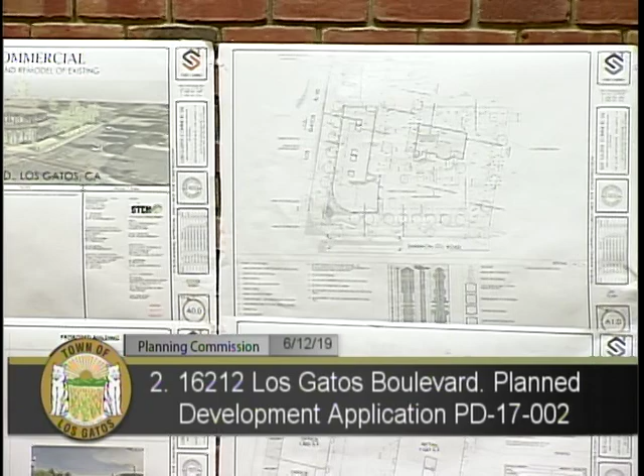The current proposal is for a two-story commercial building with retail space on the first floor and office space on the second floor. A negative declaration was prepared for the project.

The proposed PD application is consistent with the mixed-use commercial general plan designation, Los Gatos Boulevard plan, commercial design guidelines, and underlying commercial or highway commercial zoning district, minus the front setback and landscaping requirement of 15 feet on Los Gatos Boulevard. Staff recommends that the Planning Commission forward a recommendation of approval to the Town Council. This concludes staff's presentation, and we are happy to answer any questions.

Very good. Thank you. Are there questions? Yes.

As it is currently written with it being partially office, are there any limitations to the use of that, such as is there anything limiting medical offices or anything of the sort on this project? That can be added as a performance standard, that medical office is prohibited, given that that's a different parking and traffic ratio.

Other questions? I had a couple of questions. I have many questions about traffic, but I'm going to hold those until after the public hearing. But I had a couple about the process. So I understand that the review of the PD is an opportunity for the Planning Commission to review the architectural compatibility, style, and details. Is that correct? Is it the purview of the Planning Commission to review the architecture at this point?

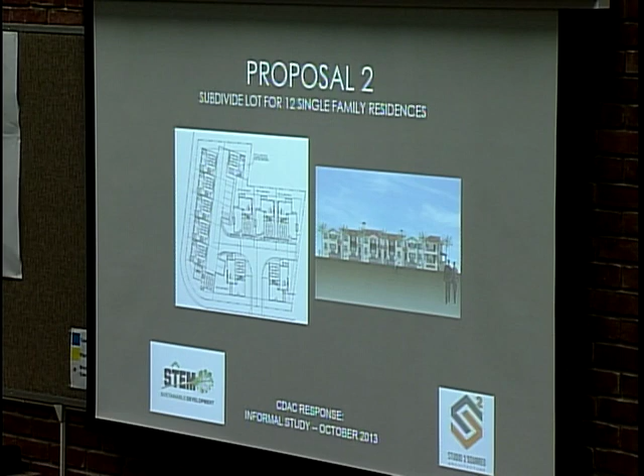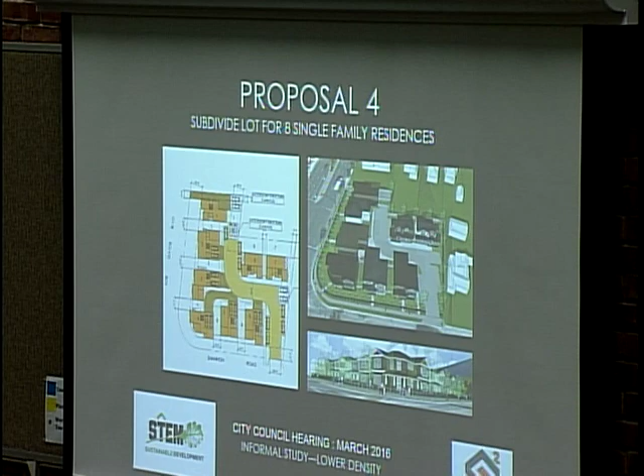From 2013 to 2016, we worked on a variety of housing-only proposals of various density. Though we felt our residential project fit well into its context, ultimately the community and the town council did not agree. At a town council meeting in March 2016, they advised us to explore a purely commercial option that was conforming with all aspects of the town zoning ordinance. This was actually the final design we presented to town council back in 2016.

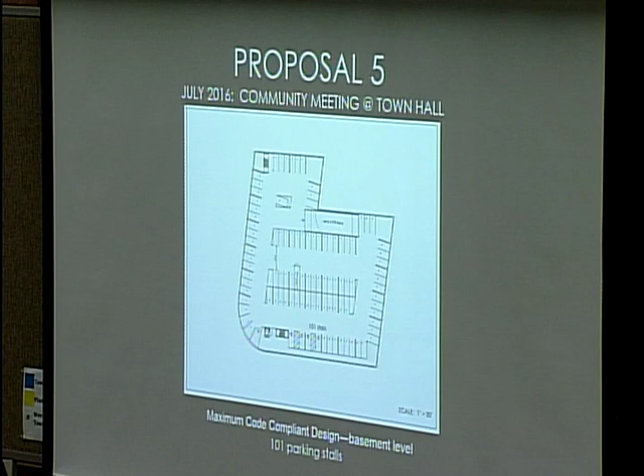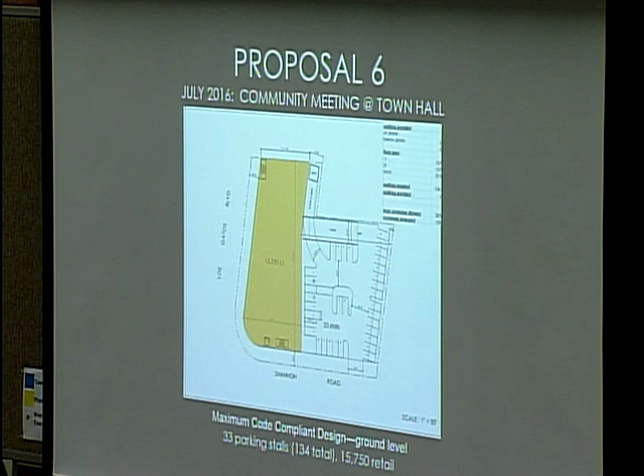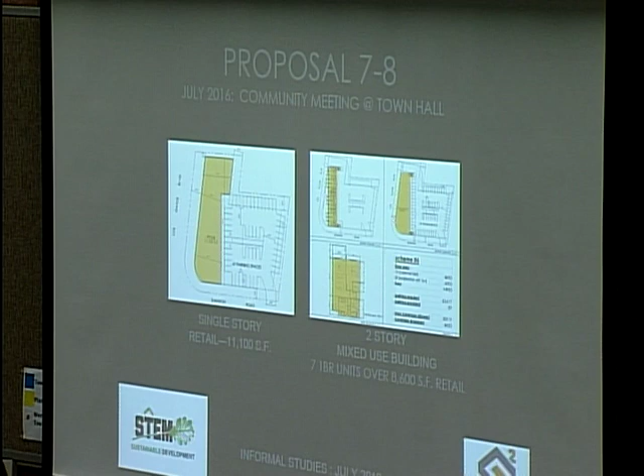Based on that recommendation, we regrouped and began to consider a fully commercial project, presenting a few different conforming alternatives at a well-attended community meeting at Town Hall hosted by Planning in July 2016. Among these options were a fully underground parking garage with additional surface parking and a 2-story retail and office building of 31,500 square feet; a mixed-use project proposing 7 one-bedroom apartments above 8,600 square feet of retail, with an all-new retail building of approximately 11,000 square feet; and finally, a retail proposal that preserved and renovated the existing 1-story dealership building while adding a retail building at the corner with a partial second-floor setback to reduce the scale of the building as seen from the boulevard.

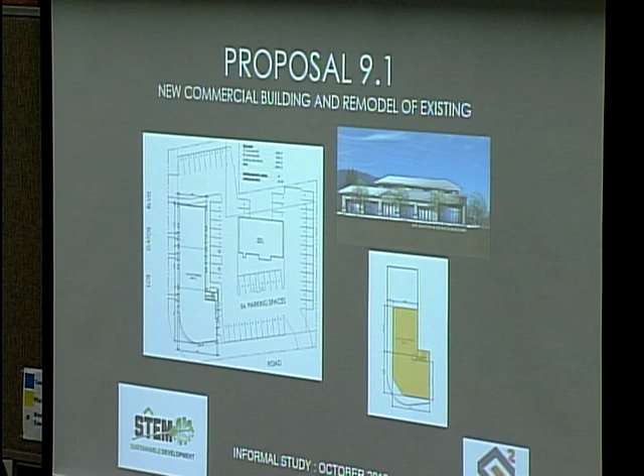That concept proposal was then developed further and formally submitted for review to the town in February 2017, largely as depicted in these few slides here.

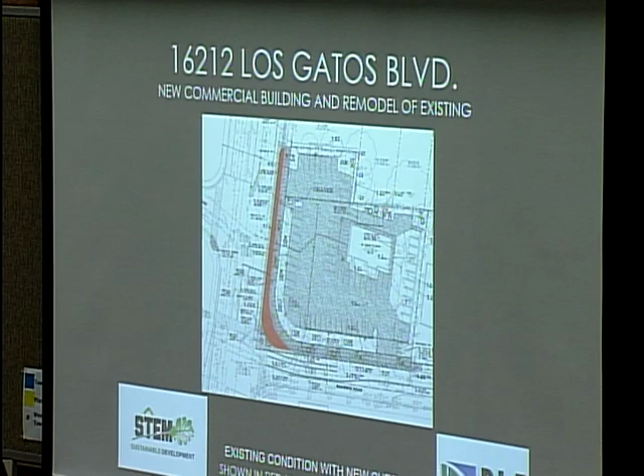During the town's initial review, staff advised us that the recently adopted Safe Routes to School program would impact our application. Here to talk about our team's response to that requirement is Scott Shork of BKF Engineers.

The Safe Routes to School program was implemented midstream in the development, and what it requires us to do is actually narrow Los Gatos Boulevard by a lane. The green markings show the new bike lane.

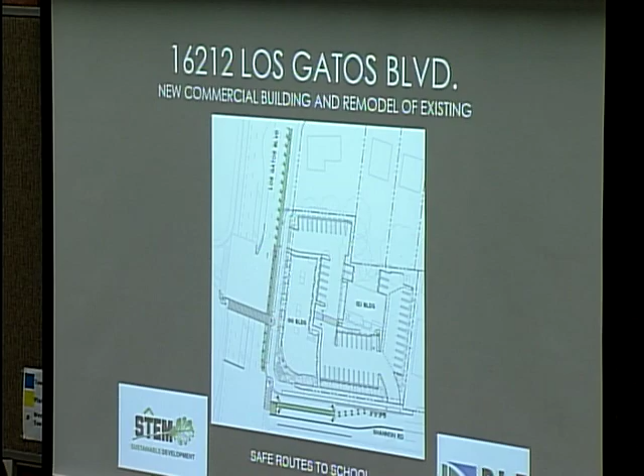The pork chop island at the intersection of Shannon and Los Gatos is a pretty unusual situation - it has a sign that says no right turn on red, but typically people don't treat that as normal. So non-residents, there's probably a percentage of people that blow through there. This is much safer for kids going to school, and it moves the crosswalk up to Roberts, making it a more efficient intersection, which will probably be addressed later.

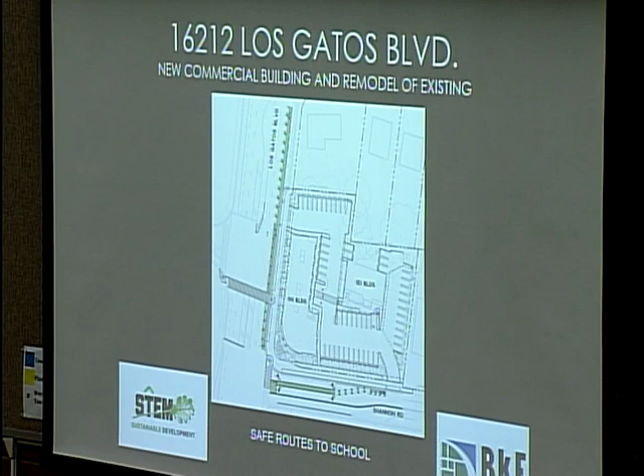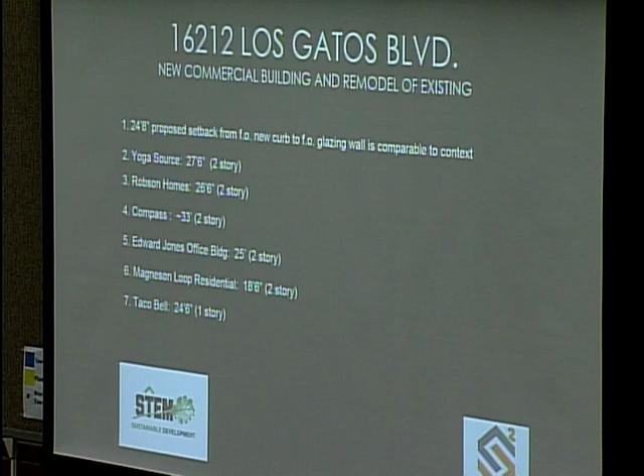Today, just for purposes of clarity, I went out and made these measurements. The new project is proposed to be just under 25 feet setback from the face of the building to the face of curb. The Yoga Source is around 27 and a half, and the Robson Homes are 26 and a half. Compass is set back a little further, and these are all two-story buildings. Edward Jones is 25 - actually, I just went back out there, and it's really 23 to 25, so about an average of 24-ish. There's a resident at Magneson Loop that's also 2 stories at 18 and a half, and the Taco Bell is the only 1-story at 24 and a half. The other thing critical to point out is the second floor of this proposed building is set back an additional 11 feet, so it's closer to about 36 feet, whereas these 2-story buildings are not set back additionally. So the point is we're pretty consistent with the neighborhood.

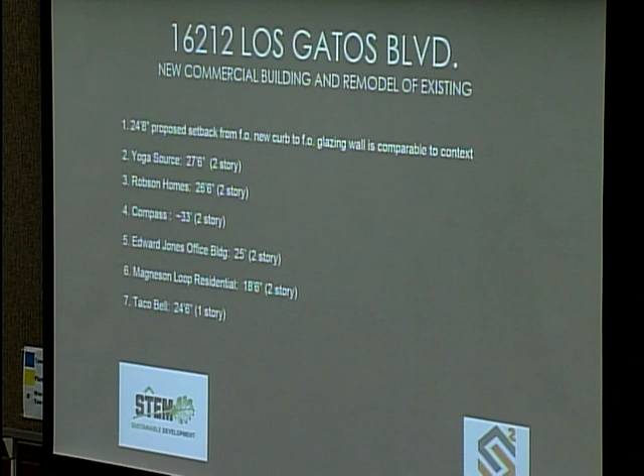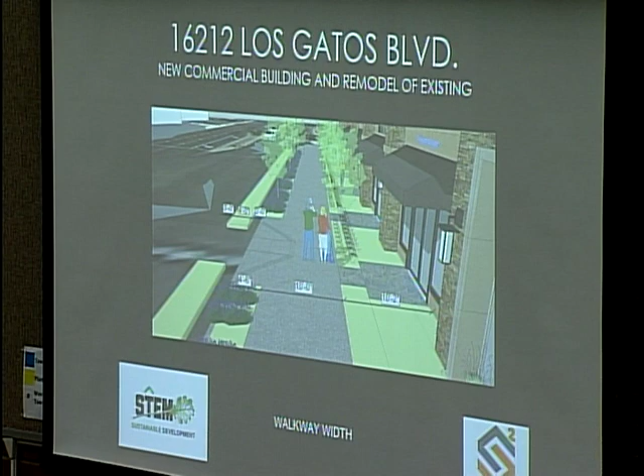So we have a little graphic here to illustrate how that 24-foot-8-and-change is divided. On the far left, we have the bike lane shown in the green strip. Then from the face of curb, working our way to the right, there's a 4'6" planter strip, a 10-foot sidewalk, and then about another 10 feet plus to the building. So that's just an idea of what that will look like.

In working with town planning staff on the initial application, and with the town's consulting architect, we've made a number of revisions to the building which we feel have improved the design and made it more compatible with the look and feel of Los Gatos. A little hard to see in these images, but among these revisions is reducing the mass of the second floor at the corner to provide a reduced scale at the intersection and better views of the mountains.

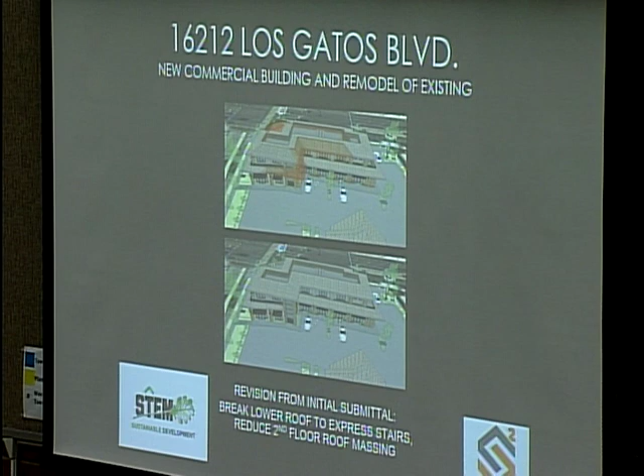On the parking lot side, we broke up the roof lines to architecturally express the stair tower between the two floors. We also refined the second floor roof massing.

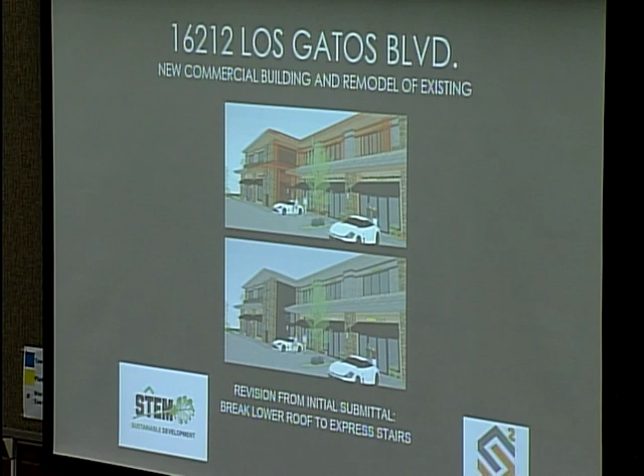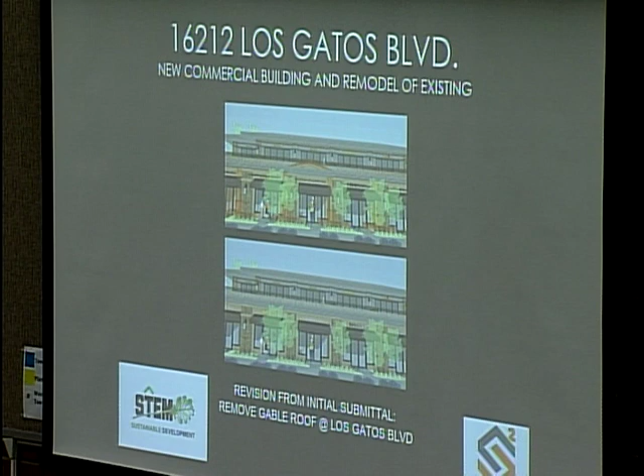Another slide of that. Another suggestion that we implemented was to simplify the roof lines along the boulevard.

Namely, we removed a gable form to basically create a continuous eave line. This last slide, most significantly, shows that we've chosen to break up the glass that we initially proposed at the corner by adding a stone portal feature. We feel this adds a nice focal point for the intersection, further enhancing the pedestrian scale and pedestrian-oriented nature of the whole intersection improvements that Scott Short just talked about.

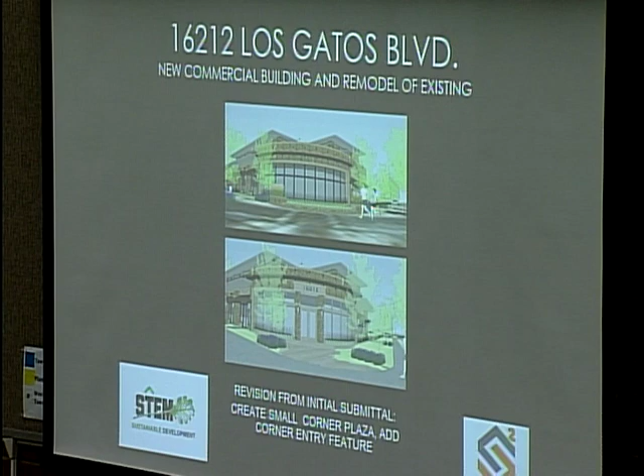Here's a couple of photo sims that we put together from a distance showing how the building will sit relative to its surroundings and relative to the views of the ridgeline beyond.

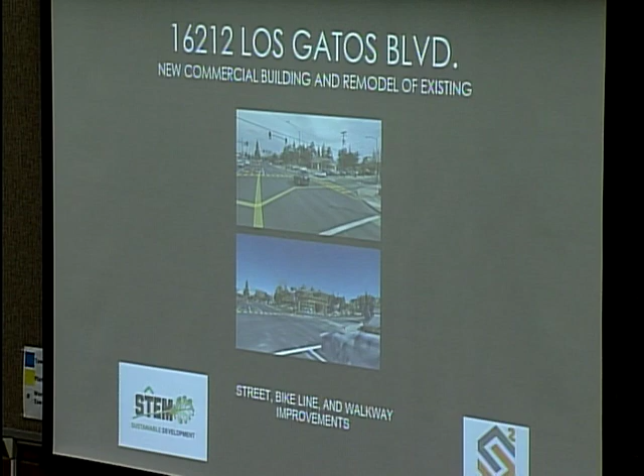This is a view we put together of the existing condition on top, showing only the dealership building, and then our building overlaid on that same perspective. And just another image of a similar vantage point.

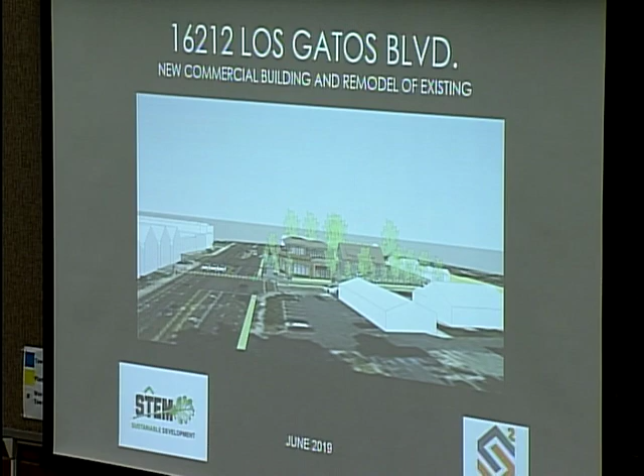In conclusion, our project proposes a fairly modestly sized development on what is currently an extremely underutilized site. The existing dealership building, as mentioned in the staff report, is only 2,300 square feet and change on a nearly 1 acre lot on a heavily trafficked site.

I'd like to emphasize that our project intentionally does not max out the development potential of the site. Under the height limit, setbacks, and coverage ratios, we could have proposed a 3-floor building of nearly 60,000 square feet that would have required 2 levels of underground parking, but would still have been compliant with current zoning, at least numerically.

Based on feedback from both the council, community, and staff, we've obviously opted not to pursue such a large project.

I also wanted to reemphasize what Scott Shork was touching on earlier, in that our project offers a very large community benefit, in that we will be one of the first projects to build out a significant portion of the adopted Safe Routes to School program at our own expense. It should be noted that this program was adopted into law in 2016, which was 3 years after our initial development application had been filed.

Finally, in the last few seconds, I know there's been a lot of concern about the installed story poles and how close they sit to the existing sidewalk. Just to further touch on what was discussed earlier by our civil engineer, the face of curb now is not the future face of curb.

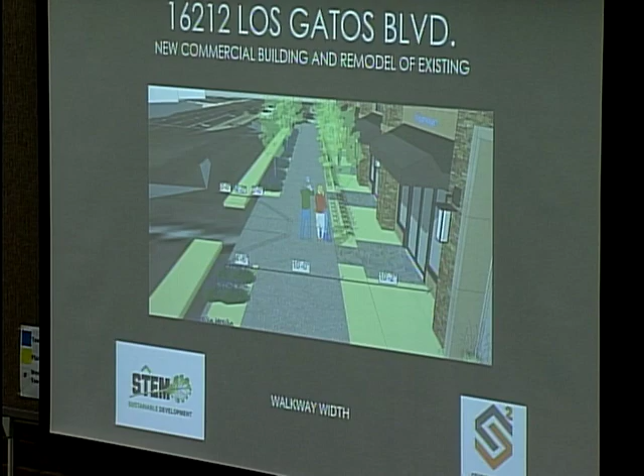Are those documents that you've provided us that you could point us to, so we could see them? Not that particular graphic, but certainly our site plan has all this information. This is not a new design — it's the design reflected on the plans before you. Okay, so we can find that information on the site plan itself. That's the one I'm talking about. Right, I did this because I felt it would be more illustrative for the commission as to what it's really going to look like, as opposed to just a black and white drawing. But what you see is reflective of the black and white site plans behind you and at your desk.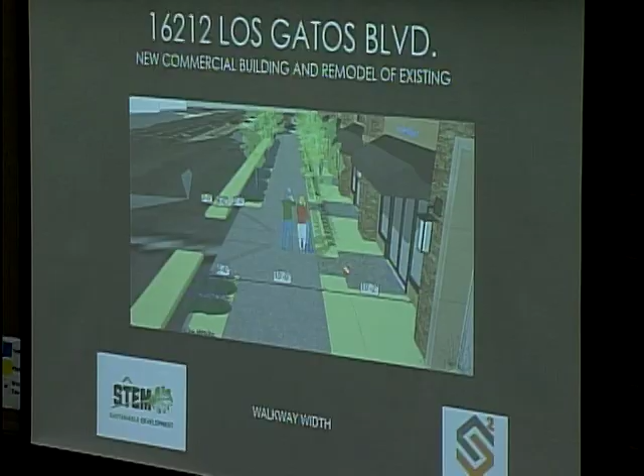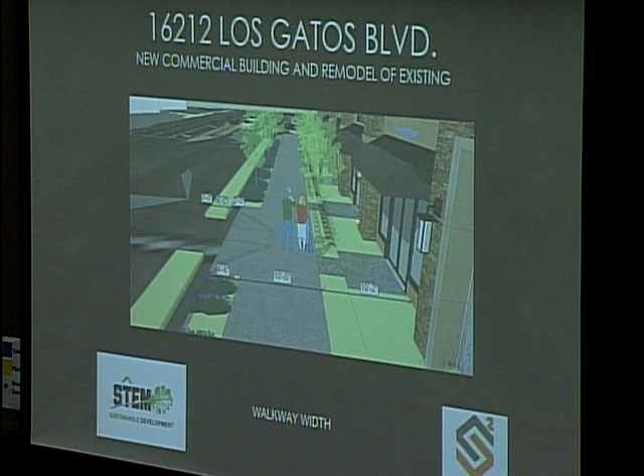Okay, thank you. To clarify the property line — it's somewhere back here. So it didn't move, and the curb used to be here, and when the curb moved 10 feet, the property line remained back here. That's why the setback of 5 feet is actually measured from this further out point, and it's really a couple more feet to the real building. So that's kind of the history of the property line. Okay, that's helpful, I can get it without seeing the numbers. Thank you. Are there other questions?

Okay, let me just check my list here.

So on the corner issue, you feel that you complied with Mr. Cannon's suggestion to increase the visibility of the hillside by the way you've designed the corner of that building? I think he stated that the corner should be one story.

I don't specifically remember him saying the corner should be one story. I believe that's in the hillside design guidelines. What Mr. Cannon provided us, and I neglected to include it in my presentation, was a suggested floor plan for the second floor. He went so far as to recommend an outline of the second floor at the corner, and we followed that drawing that he provided.

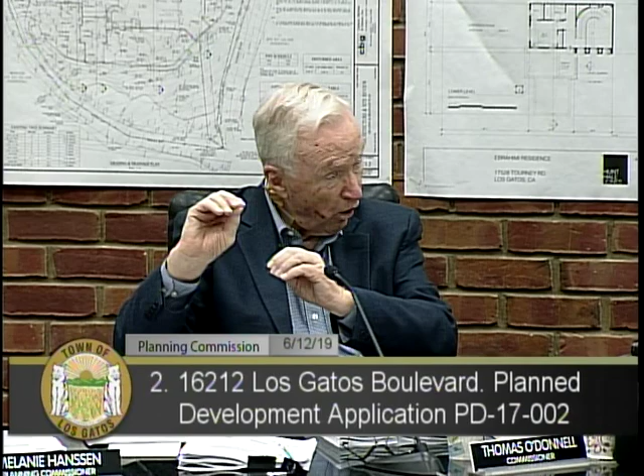I don't favor sending it back to them because I don't think they've got enough guidance to do anything. So I personally would like to see us get a motion now, because I don't think we're getting anywhere. I personally think the things we've said have been very good and helpful, but I think we're now at a point where we ought to either send it on or redo it, and I am not in favor of asking them to redo anything. So is anybody inclined to make a motion? I mean, I will, if okay.

No, I would just say that I'm not inclined to send it back because although I think the issues about the views and the boulevard are the big issues, I don't know any suggestions that I could make to the applicant that would then result in something better.

So I'm going to make a motion, but I'm going to ask my fellow commissioners to weigh in because I have not been able to capture some very good points. First off, I'm not going to ask you to come back because I agree I don't know what we'd ask you to come back with, and I think there are circumstances outside your control driving some of the decisions you're making. So for the sake of moving this on and potentially getting some answers from council, I'm going to recommend denial.

of Planned Development Application PD-17-002 and Negative Declaration ND-19-002 located at 16212 Los Gatos Boulevard.

I'm recommending denial based on concerns for the setbacks, based on concerns for the hillside views, based on concerns that seem to stem around whether there is a requirement for the modifications being made based on safe routes to school. And attached to that, serious concerns about how that's going to impact traffic on Los Gatos Boulevard by losing a lane.

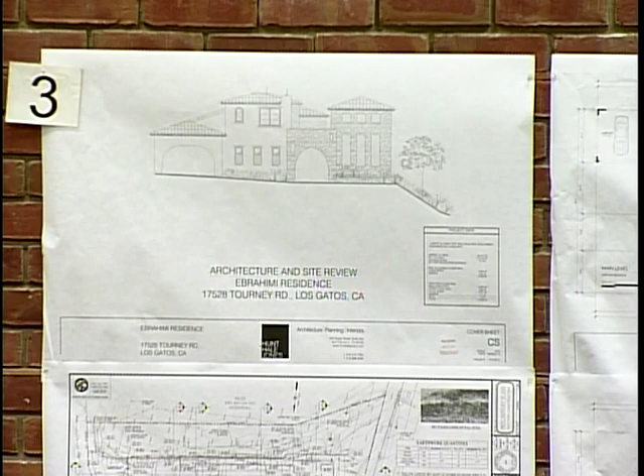The application before you is for a new home in substantially the same location and of the same size as the previous approval. As with the previous project, and based on compliance with town code and hillside design guidelines and standards, minus minor cut and fill exceptions for yard areas, the Development Review Committee approved the application.

The approval was then appealed by the neighbor to the south, who provided new information to be reviewed by the Planning Commission, referencing discrepancies in the plans and questioning the proposed massing. The applicant has since revised plans to address the discrepancies, resurveyed the site, and provided a summary of correspondence with the appellant, as well as an outline of previous plan changes made to accommodate their concerns.

The updated site survey resulted in an increased average slope, which reduced the net lot area and also reduces the maximum floor area from 4,300 square feet to 4,000 square feet. The applicant has agreed to a condition of approval to reduce the proposed house by 300 square feet.

Based on the discussion provided in the staff report, staff recommends the commission deny the appeal and uphold the Development Review Committee approval of the application, subject to the conditions of approval. This concludes staff's presentation, and we're happy to answer any questions. Great. Are there questions?

Commissioner Hanssen: I just had one quick question, and it came from the architecture consultant, on page 3 he had a profile of the previous proposal versus this one. I was actually on the commission when we did the previous one, so my question is, at the bottom he has a drawing of before and after, and if you looked at the after drawing, it sort of looks like they didn't step down the hillside as much as they did in the 2015 project. I think it's because the house is set back further away from where it drops off. So that's my question to you: am I seeing that right? Is there an issue with them not stepping the design down the hillside as we ask for in the hillside design guidelines?

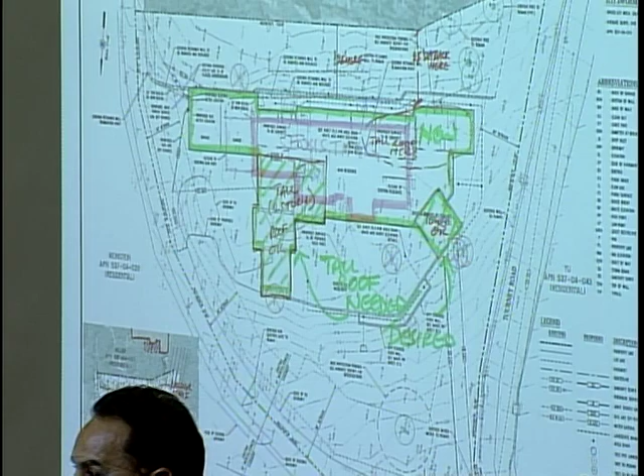I don't know if you could see it—I have the actual sheets, but this is the sheet I received from Tony and Steve when I met with them. It's hard to see, but it points out over here. You can take the microphone with you if you wish to move over there.

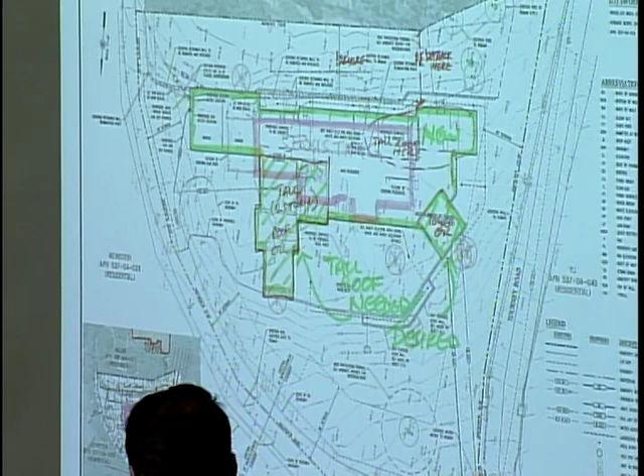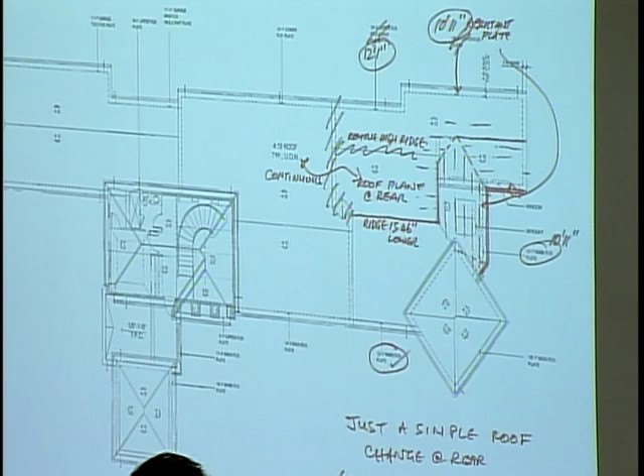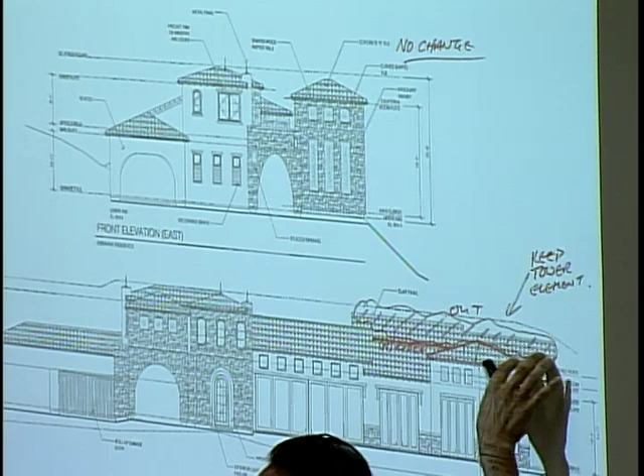So this is the sheet they gave me, explaining how they were okay with everything here. But what they wanted me to do with the plans was see if I could lower this ridge, because this is what's visible from their home. And this is the last sheet I got, where they said they're not asking for any change, but again, this is the elevation view of where they wanted the ridge to be lowered.

Based on that meeting, I revised my plans, lowered the ridge, and made my submittal, bringing the single-story portion of the ridge down to 20 feet, 10 inches. That's inclusive of the 2-foot pad drop I had done. I submitted a letter earlier, which I believe staff gave you as a desk item, showing all the emails we exchanged.

So if I could go to this, this is one of the emails in the handout you received. The highlighted section is an email from Steve to me, because we were going back and forth and I kept asking what it was that they were having an issue with.

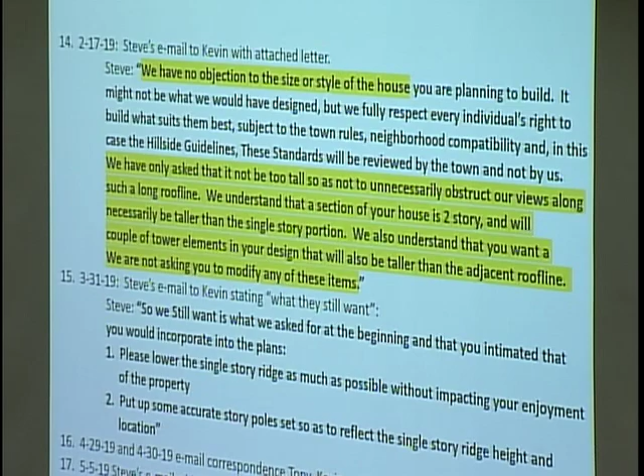I was trying to get a support letter, and the email I got from Steve said: 'We have no objection to the size or style of the house. We have only asked that it not be too tall, so as not to unnecessarily obstruct our view along such a long roof line. We understand that a section of your house is two-story and will necessarily be taller than the single-story portion. We also understand that you want a couple of tower elements in your design that will also be taller than the adjacent roof line. We're not asking you to modify any of these.'

So again, this was the direction that I got from the Millers—actually from Steve, not Bev.

So this was essentially confirming to me, as the Millers had done up to this stage, that they had no issue with any part of my application other than the ridge line, and they wanted me to further reduce below what I had, which was at the 20 foot, 10 inches.

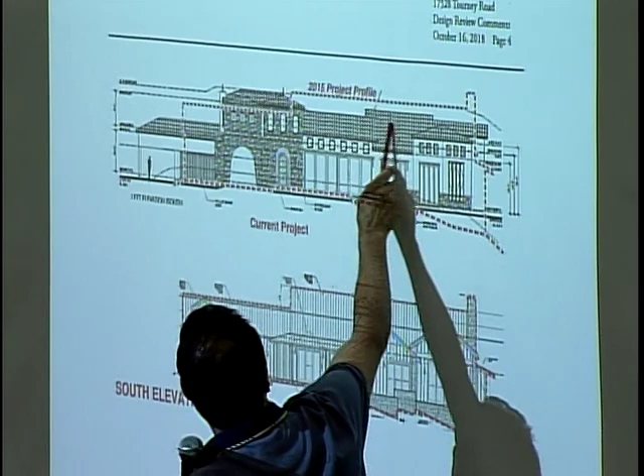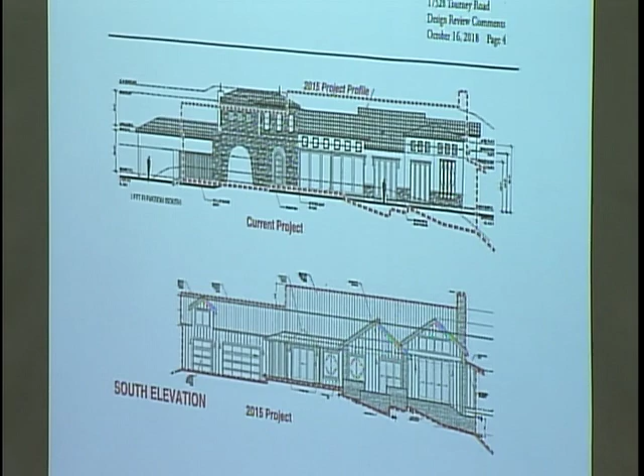It's probably hard for you to see, but this is the town architect's review comment letter, the bottom being the previously approved application, the top being my home design. This was the area that they wanted me to reduce, and this is essentially what I dropped down to, which was still much lower than what was previously approved.

And I let the previous application expire. I met with staff and asked them, what's the process? Is it better to amend it, or is it better to let it expire and for me to submit a new one? They said that's up to you, but as long as you try to stay consistent, that's what you would want to do. You wouldn't want to do something that's not consistent.

So please note that the proposed architecture is spread wider to stay. One of the things we understood would be a better design for this lot would be to not go into the sloped areas and to stay on the flat pad portion of the lot, and that's what we did. We made the house wider and pushed it back further than the previous application. The previous application did actually encroach into the slopes, and we tried to push that back as much as we could.

So why are we here? When I bought this property, the previous owners cautioned me that they had tried to reach an agreement with the Millers, but ultimately they were appealed to the Planning Commission. I had hoped through reasonable compromise I would be able to come to some sort of an agreement with the Millers. Again, they were very hospitable.

I met down at their house several times. We had wine and we discussed my home design, and we discussed many things. I really hoped we could get to some kind of compromise. I worked diligently with the Millers in addressing concerns they had brought up to me. Ultimately, the main issue is that I wasn't agreeable to reduce the ridge below the 20-foot 10 inches.

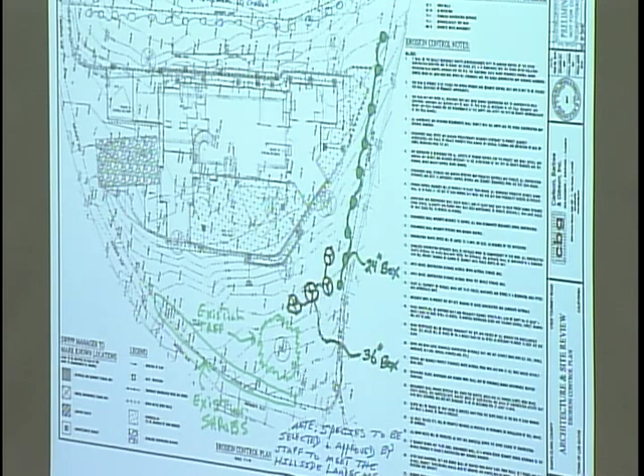So lastly, this is the landscape plan. I met with staff and they wanted to know what we could do to show the intent for the landscaping. The town arborist came back and said there is a requirement to have 4 36-inch box trees and the remaining 24-inch box. So we placed them so they would provide the most visual protection. I want that for my house, and I also want it to protect the view from the roadway adjacent to my home.

So I'm happy to be here tonight to address any questions or concerns you have. I've actually thought a lot about the issues you might have and how I would be able to address them. So if you have issues, I really hope you can discuss them with me. And as I said in my letter earlier, I really hope we can come to a conclusion and finalize the application tonight.

That's it. Thank you.

Okay, thank you. Are there questions? Yes, Commissioner Badame. Is your architect here tonight?

My architect is flying out of country tonight. The reason we elected to still have the hearing tonight is because my neighbors are also leaving the country, I believe in a few days. So the question was, do we have it when they aren't here, or do we have it when my architect isn't here? It was important for them to be here, so we had the hearing tonight.

So your architect is probably not aware of this exhibit that we got tonight from Mr. Jeans? No, but I can address almost everything that you have there. So if you ask me to, quite...

So why don't we see if there's some questions about that? Commissioner Badame, do you have questions about that? I'll rest for now. Okay, thank you.

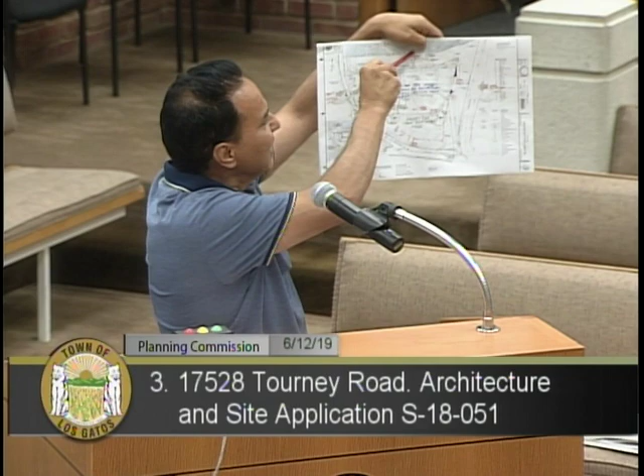That's not how staff had the previous application done, and that's not the direction that I received. The setbacks that we have has this back here as the rear, side, front, and that's how the application was submitted, because in working with staff, that is the direction we received. This is the first time I've received something that says the orientation of where the front and back is, is different. I hadn't seen this before, but staff will verify—we sat down and reviewed how they wanted setbacks to be done.

Okay, so the only other thing I see on this exhibit is 2 trees that they're saying could potentially get saved. You can check with staff—from the time I submitted my application till now, I have every intention of trying to see how many of the 5 can be saved. One of them is diseased, and the arborist said it has to go, so that will have to go. Of the other 4, I have every intention of trying to save them.

The pad is being dropped by 2 feet, which impacts some of these trees. They're absolutely correct, this Valley Oak number 9 is a great, beautiful tree. I have every intention of trying to save it.

The application has it as part of the removal, along with the other 3, making a total of 4, because I don't know how the 2-foot drop is going to impact it. But I've stated this to Mr. Safdie from the time we submitted the application. My intent is to save those because I think they provide me as much screening as I need. So that's everything on this sheet.

On the second sheet, where they're talking about the front setback line, again, that's not how it was defined by staff on how we did our setbacks. As far as the calculations, I don't know how he's calculating a 2nd-story above attic in the California room. There is a California room, so there is square footage for that.

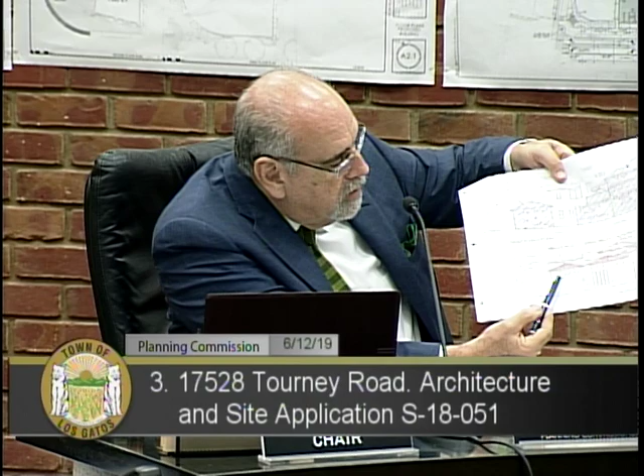I think the question the Millers had is, why do I have a window there? Because I will have 3 mechanical— actually, just make sure we're talking about the same thing. Sure. I'm talking about this. I'm sorry, I need my glasses. Okay, that's the California room. Right, and I'm talking about the attic above the California room. What's the purpose of that, and is that an architectural feature that increases visual prominence?

Yeah, so there is no attic above it. The purpose of that was to provide some kind of interest as you drive up to the front of the house. So that's all that, but there is no attic above it. That's why I was trying to understand the purpose of double counting that square footage.

What I will say is if the commissioners so choose, I can show you exhibits where I can reduce the California room height. In addition, I can also reduce the master bedroom height. I looked at it and talked to my architect. His thoughts and my thoughts were that they added interest to the architecture, but in the interest of moving on, I'd be more than happy to work with you to do that and show you.

Do you have drawings that indicate that now? Yes. Would you be willing to share them with us? Sure. Oh Ryan, can I? Oh Ryan, it's not coming up.

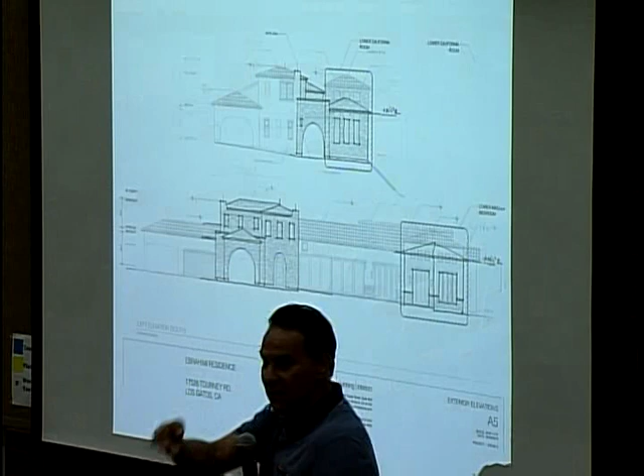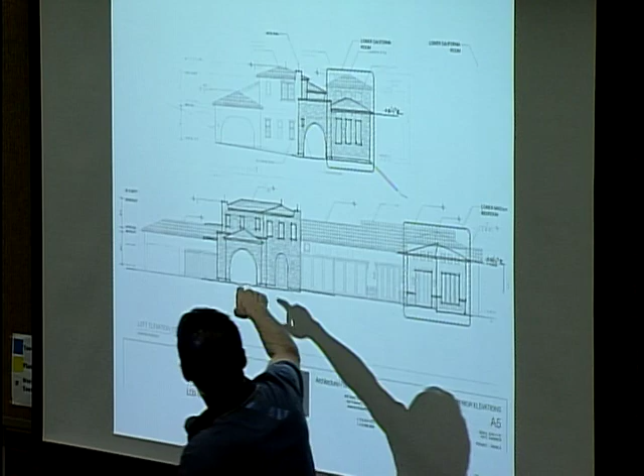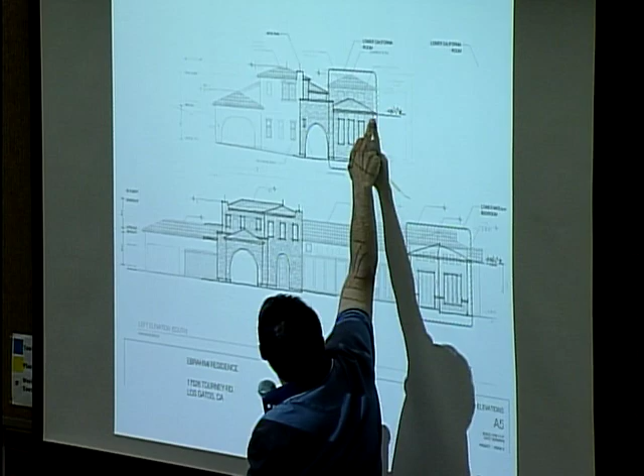So if the commissioners so choose, what I could do is drop it down, and again, I hadn't seen it before, but I think that's what Tony was proposing. I can drop the master bedroom down. This is the height here, drop it down. And the same with the California room, drop it down, which is here now, dropping it down to here, which is very close to what I think Tony had, which brings this to a 12-foot, same line as the rest of the great room.

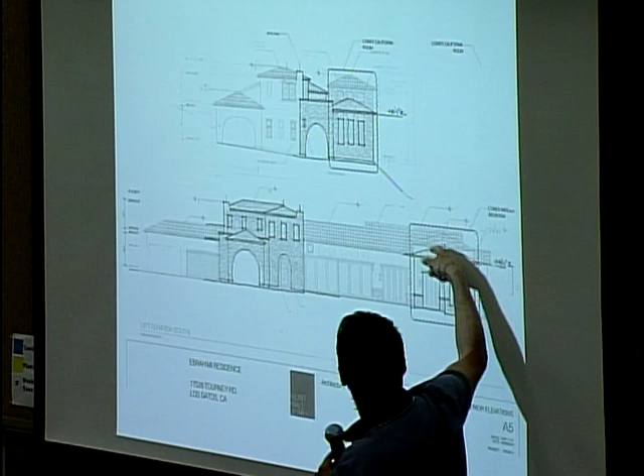Quick follow-up to that. Is that something that would be visible from the Miller's property? No, because, well I say no to the master bedroom, because as you're looking from the Miller's property, this ridge is higher than the master bedroom, so you can't see the master bedroom.

And as you're looking from the Miller's property, you're looking down from this direction through here. But you would be able to see the California room, the shortened height of the roof there, from the Miller's property, is that correct? Probably. Okay, thank you. Other questions?

Thank you. Again, if I could add, I really want to work with you to be able to move forward if we can. Thank you.

Thank you. I have one more card, which is Lee Quintana. If anyone else would like to speak, I'd be happy to take cards. Oh, I see, I thought you were part of the applicant's team. The applicant's team? Could you clarify whether he's part of it? Okay, Lee Quintana, please go ahead. We'll straighten this out. So, okay, Lee Quintana.

Unfortunately, I haven't had the privilege of looking at all of the plans that you have been able to look at since the overhead wasn't working. But my comments primarily deal with the fact that DRC approval is based on meeting technical requirements, which are the objective requirements of the zoning code and the hillside development standards and guidelines, and not necessarily the standards and guidelines themselves, especially because many of the standards and guidelines are not objective. They're shalls, but they're not objective shalls that give you numbers to work with, so there's a lot of discretion in determining whether they're met.

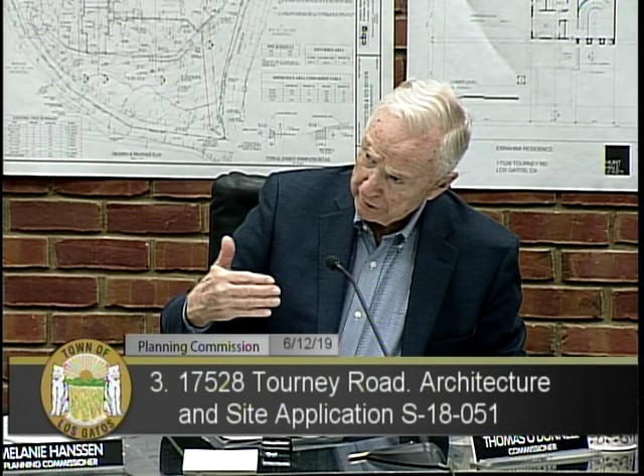Commissioner O'Donnell: Some of the things that have already taken place, I want to just verify. For example, the reduction in the total square footage as proposed, I think went down around 300 feet. And that's going to be done, right? All those things will be done. Right, so we don't have to do that.

So I think we have the motion now, and we've got some suggestions, I think, to add on to that. And if we do, I would adopt that, if the seconder would too. Yes, I would.

Let me make one more comment about process. This has been very challenging tonight, to be presented with documents with no advance notice to review. And if it weren't for the fact that we were having projector problems, I would be requesting a continuance so that we had adequate time.

I think that we are obliged to review all documents that come before us, including those presented in the meeting. However, we have to put the weight on them that is commensurate with our ability to understand them. To be presented with a document during a meeting that has specific changes we can't relate back to other drawings would, in my mind, be completely unacceptable, but for the fact that we didn't have a projector tonight. So that's just my comment on the process.

I will call the question at this point. All in favor? Aye. Opposed? So it passes unanimously, 5-0.